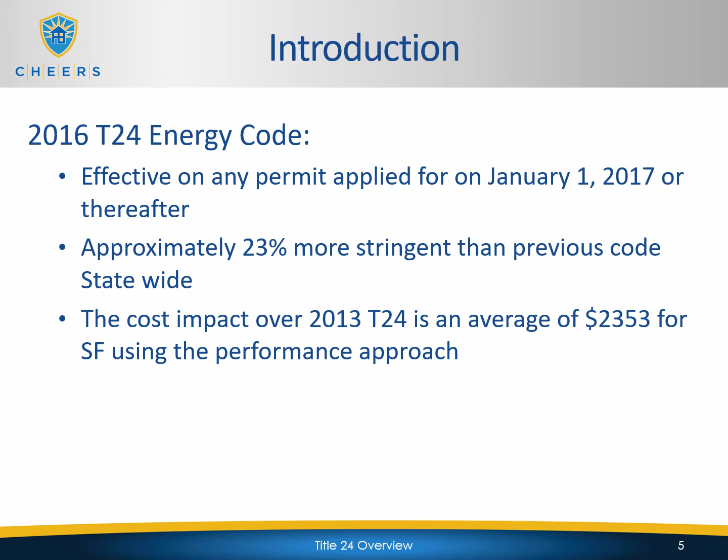When we look at a cost impact, we're looking at about an average increase of $2,300 for a single family home if you're using the performance approach. As you go up in stringency, the cost to comply also goes up, similar to the cost increase for the 08 to 13 code, but still it's a significant amount, and you can understand why a production builder might go in and pull those additional permits to save that dollar amount per house. It adds up over time.

These are just some key definitions for reference. They're just here for you to refer back to. They're going to be in your manual as well, where this PowerPoint presentation is included. You'll be referring to most of these items throughout the presentation as well, so you just need to be aware of what they are. HERS stands for Home Energy Rating System. The AER is the Appliance Efficiency Standard.

ASHRAE regulates mechanical ventilation requirements and indoor air quality requirements. ASHRAE itself stands for American Society of Heating, Refrigerating, and Air Conditioning Engineers. The CEC is the California Energy Commission. We'll be talking about energy budgets and energy credits. NAECA, which is what I mentioned a second ago, is the National Appliance Energy Conservation Act. So that is the regulation on a national level that regulates appliance efficiency. And then we'll be talking about time-dependent valuation, and then Title 24 and Title 24 Part 6. So moving forward, we'll be referring back to some of these items as we go along.

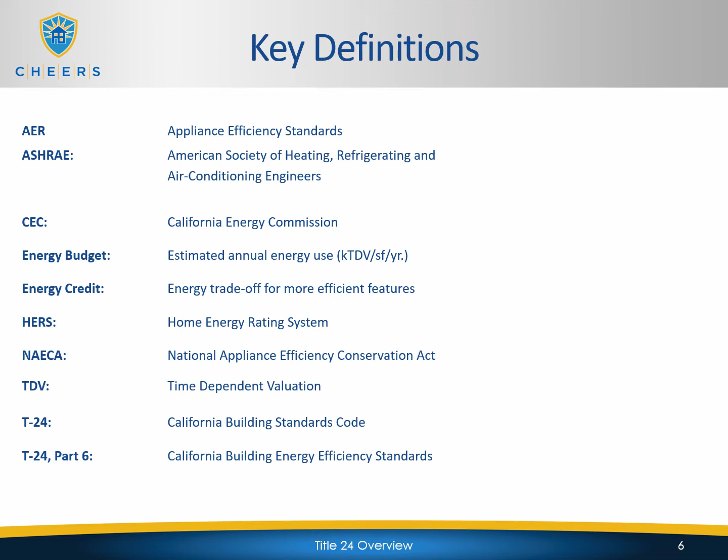So in order to be compliant with Title 24, there's two methods of compliance. And these are the two. So you have the prescriptive method and you have the performance method. Regardless of what you do in California, these are the only two approved methods that you're going to use to achieve Title 24 compliance. So the prescriptive method is the Title 24 when it's achieved by following preset Title 24 specifications and mandatory requirements based on the climate zone that you're building in.

The performance method is achieved by having a Title 24 energy analyst demonstrate a project's Title 24 energy compliance by analyzing the building using CEC approved Title 24 software. So basically anybody can use the prescriptive method. There are preset tables, which I'll show you an example of here in a sec. Basically, as long as you transfer the correct values from the tables to the forms and then submit the form properly, you're able to, I guess, preset your Title 24.

When you're using the performance method, an energy analyst actually has to run the building design through software, and the software will determine whether that's a compliant plan or not. The difference between the two mainly is the fact that with the prescriptive method, you can't trade anything off. You have to do exactly what the tables say based on the climate zone that you're in.

With the performance method, aside from the mandatory measures, which you always have to do in both prescriptive and performance, you can trade certain items on and off, or you can increase and decrease certain values to customize the design to what you want to do. But again, you have to have an energy analyst running the software on the plan. It's not automatic.

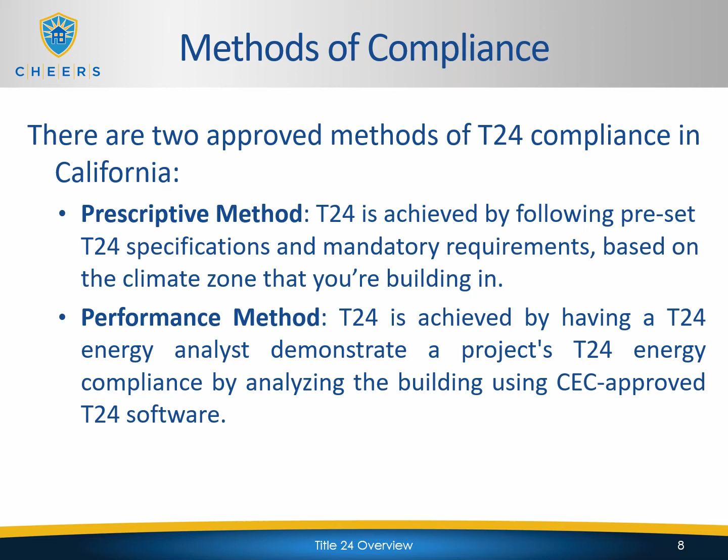So the first way to do it is the prescriptive method, like I mentioned earlier, and the prescriptive method uses prescriptive package A, which I'll show you in a sec. Those are the tables that I talked about in the previous slide. So in the old code, there used to be multiple packages. So you would have package C, D, and E, and each package would have different values and they would be applicable to different scenarios. However, in the 2013 code, they condensed it down to one package. It's package A, and that's the only table you can pick from in order to determine Title 24 compliance using the prescriptive method.

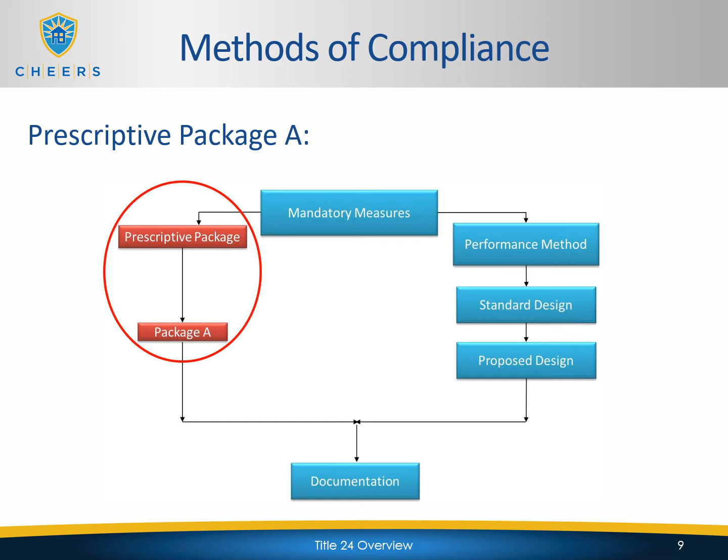So the only thing the person would need to do in this particular scenario is transfer those values to the CF1R, and we'll talk about the forms in a sec. And then those forms will be submitted to the building jurisdiction for permit application, just like anything else.

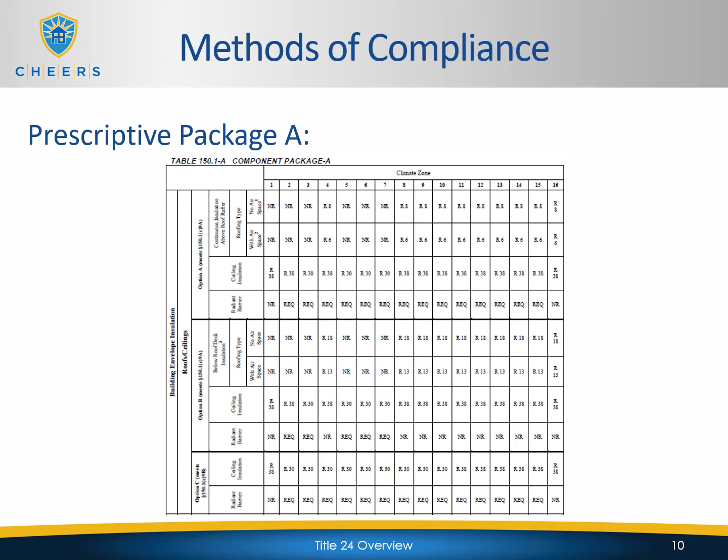Now the other option is the performance method, and like I said, the performance method is based on what the client tells the energy analyst to design the building as. So the performance method is always based on the prescriptive package requirements. The only thing that the performance method allows you to do is to offset some of those requirements by making up values and efficiency somewhere else.

You always have to follow the mandatory requirements no matter what, but just to give you an example, you might be able to bring down insulation values by raising the efficiency of the windows or the roofing or something else along the line of energy efficiency. So that's how it works. And then it's based on the standard design, which is the prescriptive package.

And then once the energy analyst changes whatever it is that they change, they come up with the proposed design, and that's the design that's turned into the building department for permit application. And either way, whether they go performance or prescriptive, it takes us down to our documentation process, and the documentation process and the forms are the same. It doesn't matter. So we'll talk about those in a sec.

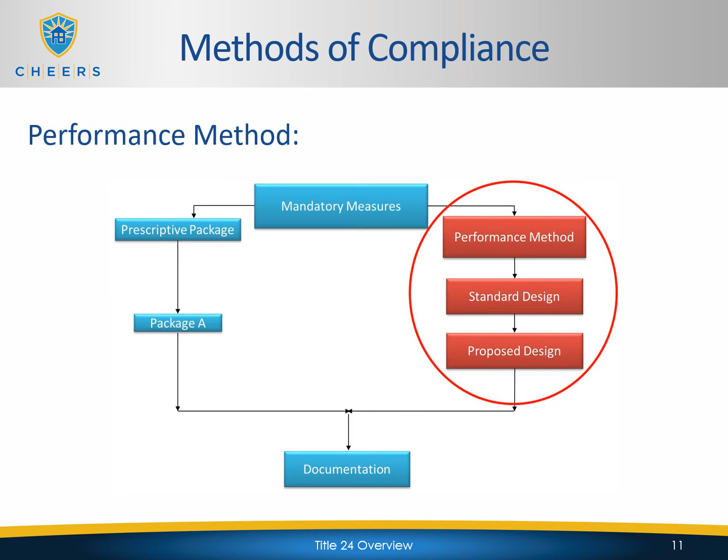And now we're going to talk about, in fact, the compliance documentation. So the compliance documentation and its process is a requirement to receive a building final. A building inspector cannot issue a certificate of occupancy unless all necessary compliance documents, which are the CF1Rs, the CF2Rs, and the CF3Rs have been completed, and we'll talk about what those forms are in a sec.

Electronic registration of the forms is only required when HERS measures are required. So we're going to be talking about the forms, and you as a HERS rater will have to upload those forms into the CHEERS registry. However, that's only required from you as the HERS rater when there are in fact HERS measures required on the project.

Now, from a brand new construction, residential new construction standpoint, a lot of the HERS measures are mandatory, so you're always going to see HERS measures in this code cycle. However, in the additions and alterations, you might still run into situations where there are no HERS measures required. So if there are no HERS measures required, electronic upload of the forms in the registry is also not required.

And the only thing that would still be required would be the paper forms turned into the building department for application and then final. But again, if there are no HERS measures required, you're not even going to be around that project to do anything about it, because your inspections are not going to be required.

All permits requiring HERS inspections will require all forms to be processed electronically through the registries, like I mentioned a second ago. So when I'm talking about processing the forms through the registries, you're not actually filling out the form on paper and then uploading or scanning the form to the registry. You're going to be entering the information directly into the registry, and then the registry produces the form that you will print out and give to the building inspector, subcontractor, builder, whoever it is that collects them, or you may also download them in soft copy and email it to them.

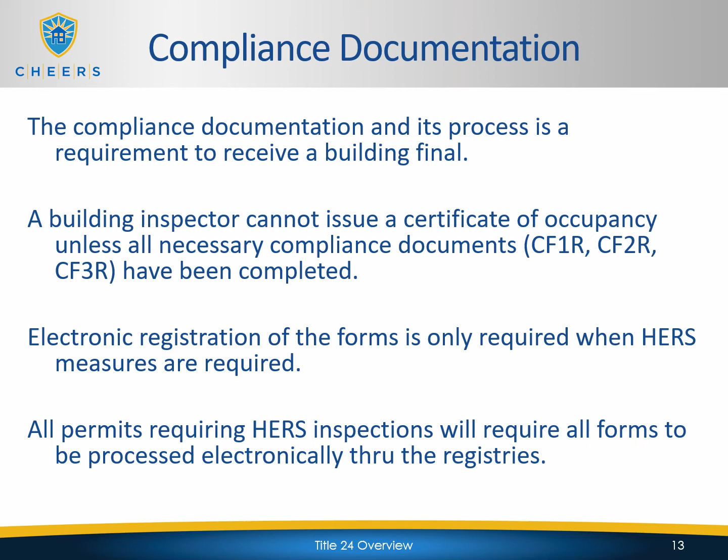So the three sets of forms that we have are the CF1Rs, the CF2Rs, and the CF3Rs. The CF1R is the certificate of compliance. So this is the form that's either filled out by the person using the prescriptive package table or by the energy analyst by using the computer. Documents will need to be done in order to comply with the building energy efficiency standards by summarizing what HERS verifications are required and the targets for those verifications.

It's generated at the beginning of the process and submitted as part of the permit application. It's typically generated, like I said, by the energy consultant, but it's certified electronically by the builder in the registry. So the form will be again uploaded into the registry. And from there, it creates all the targets and the other forms that the HERS rater and subcontractors will need to be filled out.

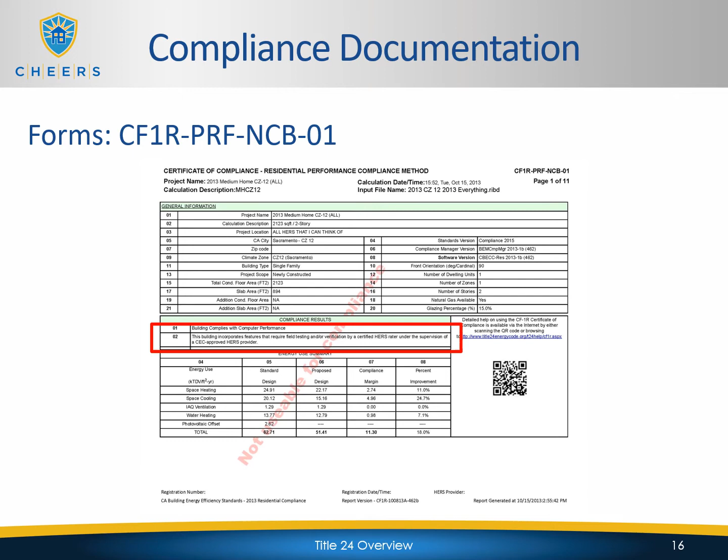Now the CF2R is the certificate of installation. Now up to this point, the CF2R in the older code cycles was referred to as the CF6R. So if you ever hear that term CF6R, that is basically the equivalent of the CF2R under the new code. So you're not going to be saying CF6Rs anymore. All forms under 2013 are going to be called CF2Rs. These are the certificate of installations.

These are the forms filled out by the subcontractor, basically certifying that whatever it is that they're installing is matching or exceeding the standards set by the CF1R. So the documents that the installing contractor did to comply with the building energy efficiency standards and requirements of the CF1R, like I stated. It's completed by the installing contractor when the work has been completed. And keep in mind, there are CF2Rs required even when there are no HERS verifications.

So there's a lot of forms in Title 24. Some of those forms are HERS forms and some of those are not. Even if there are no HERS verifications, there are still forms filled out by the subcontractors that are required, whether there are HERS verifications required or not. When there are HERS verifications required, even the forms that don't require HERS verifications are required to be uploaded by the contractor into the registry.

So in some cases, it might be completed by the HERS rater on behalf of the installer, but it still needs to be signed by the installer. So there are situations where the subcontractor might contract the rater to fill out the forms for him. However, the subcontractor is still required to sign the forms because they still hold the liability for the form, regardless of whether the HERS rater is actually filling it out or not.

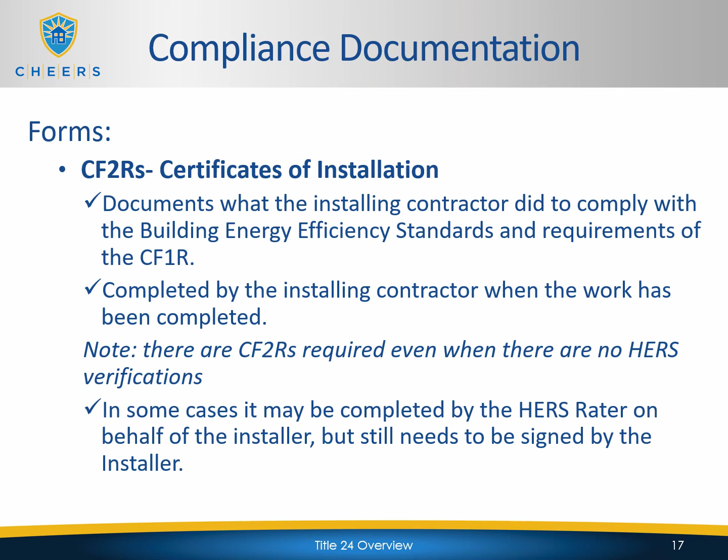The CF3R is a certificate of field verification and diagnostic testing. So this is the form that's actually filled out and signed by the rater, and it's the form that's QA'd to make sure that it's filled out properly by the CHEERS QA. So this is the form that the HERS rater is ultimately responsible for. The CF3R used to be called the CF4R in the older code cycles. So again, if you hear the form CF4R, don't get confused. That's just what the CF3R used to be called in the 2008 code cycle and before. 2013 moving forward, it's called the CF3R.

So the HERS rater fills this out, and it's the certification that the tested energy features match or exceed the requirements of the CF1R. It's filled out after a CF2R is completed, and the results of the field verification are entered by the rater in the registry, and then the CF3R is published. If sampling is used, the CF3R is still produced for all lots, tested or sampled. So we'll talk about sampling in a little bit, but basically the HERS rater doesn't test every single home. They test one out of X amount of homes. But basically, whether the home was tested or not, a CF3R is still produced by the HERS rater.

The difference is the fact that the CF3R for the home that was actually tested will say tested, and will have obviously all the test information. And then the home that was sampled will have a CF3R. It's not going to have any test information, but it's going to have a checkbox that says passed as part of sample testing. So either way, every single lot will have an individual CF3R with an individual address on them, whether it was tested or sampled.

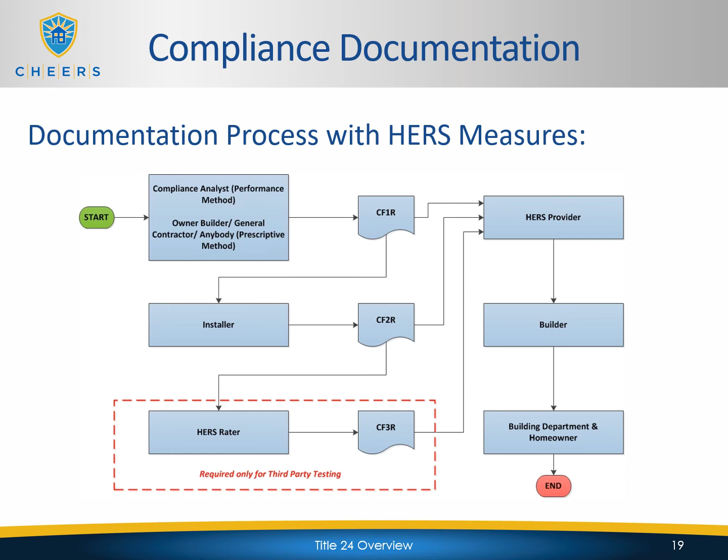Now, when we talk about HERS provider registries, we're specifically talking about those organizations that are private companies. They're separate from the state government, but they are regulated by the state government. So here in California currently, there are two. This number changes occasionally depending on if there are other companies that go through the certification process with the CEC, but currently we have two, CHEERS and CalCerts, and obviously you've heard of CHEERS because you're here going through our training. And so both of these companies, as I mentioned, are independently owned and operated.

They're both heavily regulated by the California Energy Commission. They have to provide the same training, as well as the registry has to perform in a way that complies with the state regulations. We have to have the same QA programs. So everything is virtually the same, but we're allowed to go through certain things a little bit differently.

For example, our user interface for our registry is completely different than that of CalCerts. You have to enter in all the same information, you get the same documents, but we just go about it in a little bit different manner. So that's really the difference between the HERS provider registries. As I mentioned, there's two right now. Sometimes there's more than that, but currently that's what we have.

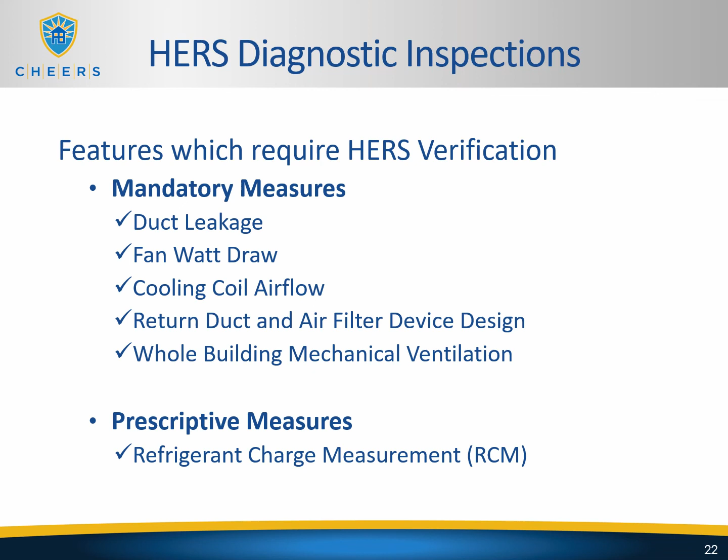Now, when we looked at prescriptive package A, those were the measures that were required, or the values that were required prescriptively, and can be modified if you use the performance method. So refrigerant charge measurement is prescriptively required in climate zones 2 and 8 through 15. So it's not in every climate zone, but only certain climate zones. If you do use the performance method, you can remove the requirement for refrigerant charge, but you will have to replace the credit that it had with something else.

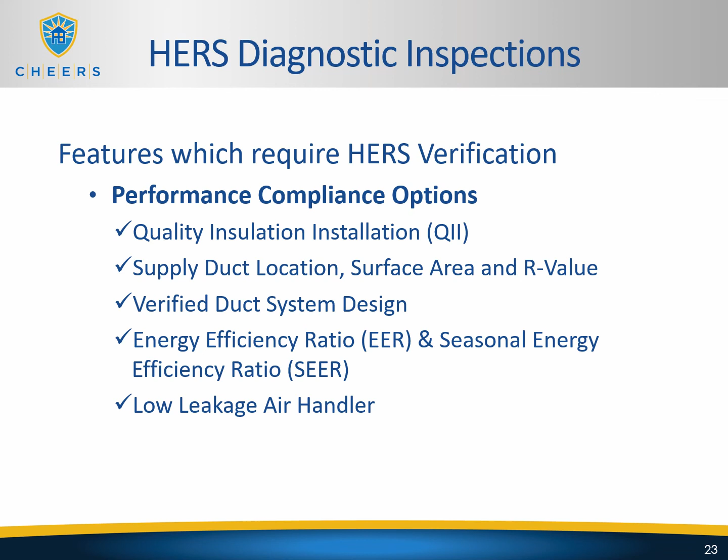We start with quality insulation installation, or QII as it's more commonly referred to, supply duct location, surface area and R-value, verified duct system design, energy efficiency ratio and seasonal energy efficiency ratio, or EER and SEER, low leakage air handler, pipe insulation credit, central parallel piping, compact hot water distribution system, water heating recirculation systems, building air leakage or blower door, and then we also have two items which are not for the performance compliance so much.

However, they can gain credit or be used for, in the case of the photovoltaic or solar inspections, programs such as the New Solar Homes Partnership. It is HERS verification. It's not required for Title 24, but there is credit available for photovoltaics as a performance option. And then existing conditions for performance alterations, and we'll talk about those when we get into the additions and alterations section, but those are verifications by the HERS rater actually before compliance is completed. But we'll talk about those more. But all of these do require HERS verification.